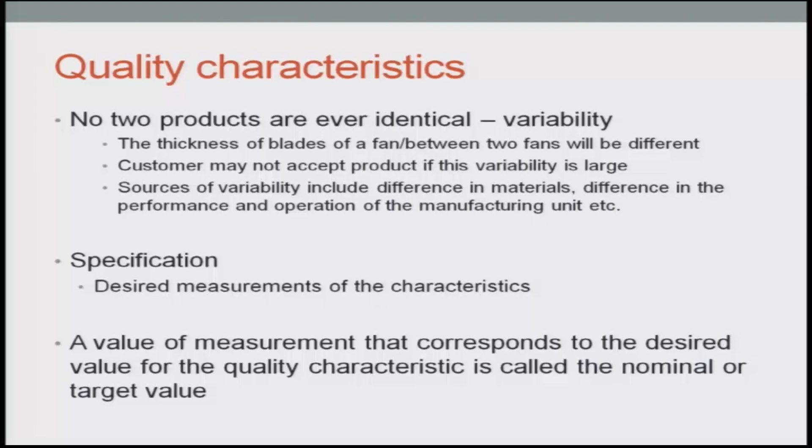So, this target value is basically the value which you want to achieve when you are trying to manufacture this product. Considering the example of the tie rod, the actual target value is 12.5 meters, or 12.5 feet, whatever it is.

The values which I am mentioning may not have any actual practical examples, but the values in the numeric sense would give you an idea of what the target values are, and the characteristics of the overall product would be to adhere to the numerical characteristics of shape, size, scale, color, whatever it is, based on which I am trying to utilize that product.

Or say for example, the quality of the cloth or the garment which I have purchased: if it is a woolen garment and the quality of the wool is very poor, obviously it means that with very few washes the level of quality or usage of the wool garment would decrease, which means the durability is very low, which means the variability would have a huge negative implication on the concept of quality for that product.

Now, we will be meeting for the first time a few characteristics in the quantitative sense, and you will see these characteristics appearing time and again when we discuss the quality control charts, the X bar charts, the P charts, the R charts, and so on. So, let us spend some time understanding this quantitative concept in a qualitative framework, such that when we actually do the problems, they would become much clearer to you.

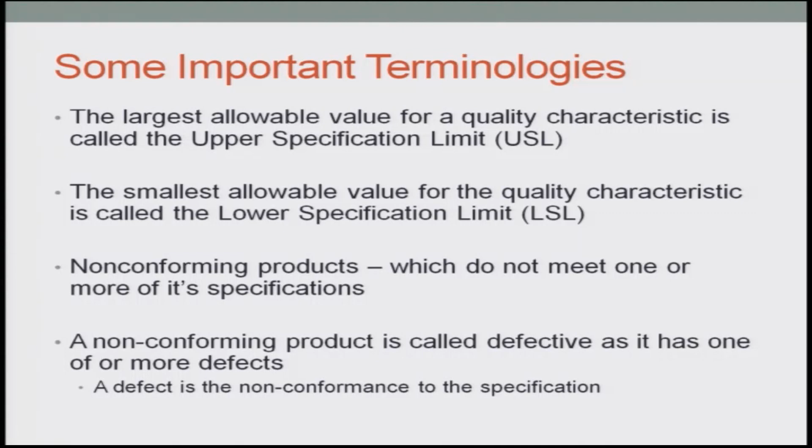It may be related to color, it may be related to length, it may be related to weight, it may be related to height, it may be related to texture, it may be related to, say for example, pH scale. Consider you are trying to manufacture a chemical, and consider it is a fertilizer, and you want the pH scale to be absolutely neutral.

In that case, if the characteristics of the fertilizer are not as per the pH scale, it is more acidic or alkaline, it would mean the actual characteristics would be non-conforming to what it has been designed for, and it would be called a defective product.

Or say for example, you have purchased a cloth to be used during the summers, and you thought that it should be able to give you comfort considering the very high humidity or high temperature, and the cloth is of terylene type or terrycot type. So, obviously, it would not be able to soak the sweat of your body, and it would not meet the actual quality characteristics for which you have purchased the product. So it would mean a defective product or non-conforming product.

Examples to continue this would be, consider the blade of the fan. Let the length and the thickness be two quantities which we are trying to measure. For the length, say for example, the target, which is the middle line, or considering this is a normal distribution, the mean, median, mode, whatever we say, is 30 centimeters. And if we consider the normal distribution to be true, which may not be true in many of the examples, we will try to utilize the normal distribution for our general studies.

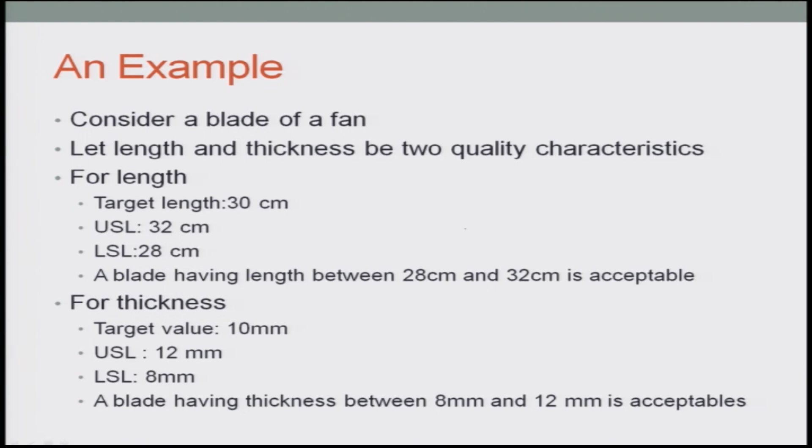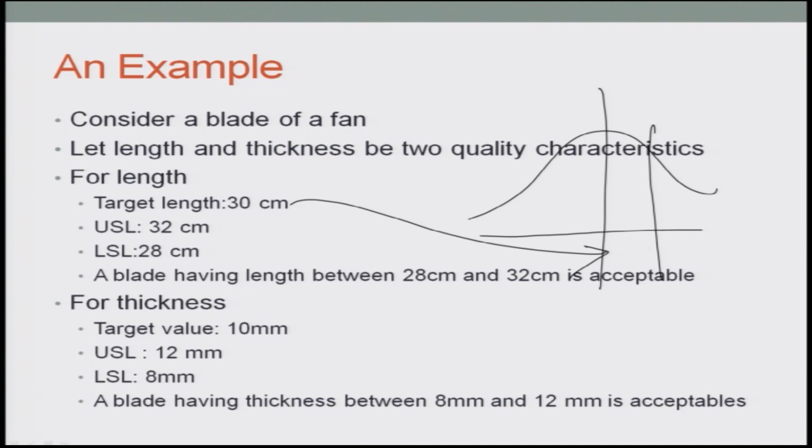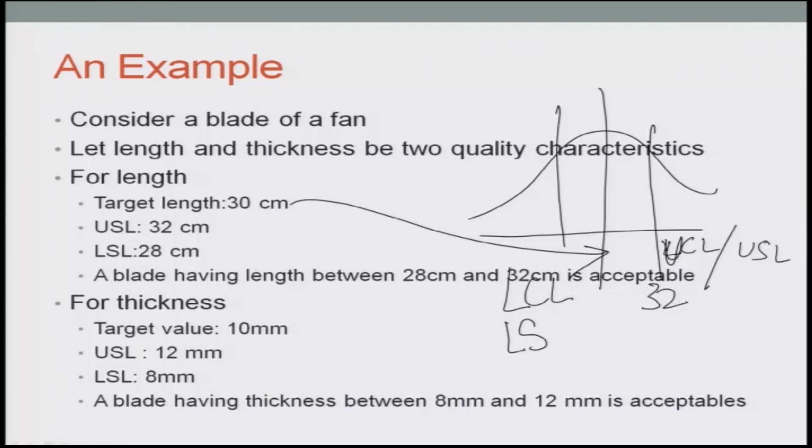So, this is the normal distribution, the mean value being 30, which we have measured, the UCL, sorry, UCL or USL being 32, and the lower control limit or lower specification limit being 28, which means the differences are 2 centimeters here, 2 centimeters here.

So these 2 centimeters which you are considering as the LSL and the USL need not be plus 2 or minus 2. It can be, say for example, plus 4 and minus 4, but the level of difference from the central value or the target value would depend on what you are considering as the variability or the actual dispersion of the distribution based on which you are measuring. I will come to that later on.

So, considering the example of a target value of 30, upper value 32, lower value 28, a blade having length between 28 centimeters and 32 centimeters is acceptable. Or consider the actual HP of a motor; it is rated, say for example, 200 HP, and if the motor is between a value of 190 and 210 HP, you will consider that motor as conforming to the actual quality characteristics.

Or say for example, you are making a special type of paint to be utilized in painting a room, and the grade of paint is, say for example, within plus and minus whatever level of measurement of paint you are utilizing. If it is conforming to that, you will utilize that paint in painting that room.

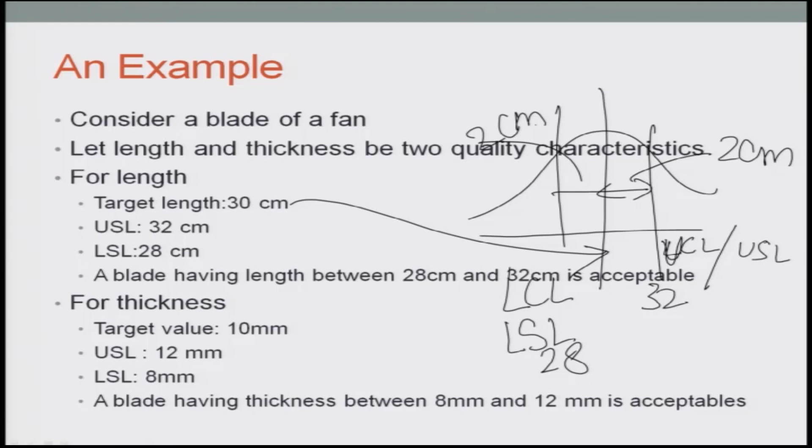So, this value of LSL, USL or the upper value and the lower value may change. Say for example, it may become 14 in the second example, and the lower value may become 6, which means 10 plus 4 is 14 and 10 minus 4 is 6. So, in that case they may conform to the characteristics depending on what you have preset as the values of the upper control limit and the lower control limit. That would depend on the level of quality which you want that product to conform to.

So, in that case all the products which are outside this range, to the right of 14 and to the left of 6, would obviously be considered as defective products and not conforming to the characteristics of quality which you have assigned yourself to measure.

Consider the examples further on. So, if you match with the length and the thickness, if a blade has length 32 centimeters and thickness 6 millimeters, then it is said to be non-conforming, defective and has one defect for the thickness. So, obviously, it meets the characteristics of the length, but there is a defect in the thickness. So, there is one level of defectiveness.

So, consider the second bullet point. Here if a blade has length 33 centimeters and thickness 9 millimeters, then it is said to be non-conforming or defective and has one defect, and the defect is with respect to the length. Because if you remember, the length target value was 30, plus value was 32, minus value was 28. So, this value 33 is above the upper control value, but this 9 millimeter was within the range. So, it meets the characteristics from the thickness point of view.

Considering the third bullet point, if a blade has length 34 centimeters and thickness 6 millimeters, obviously 34 means it is not conforming to the length, 6 means it is not conforming to the thickness. So, hence it is said that it is non-conforming or defective on account of both the defects, because it does not adhere to the properties of thickness and length based on the upper value and the lower value for this example.

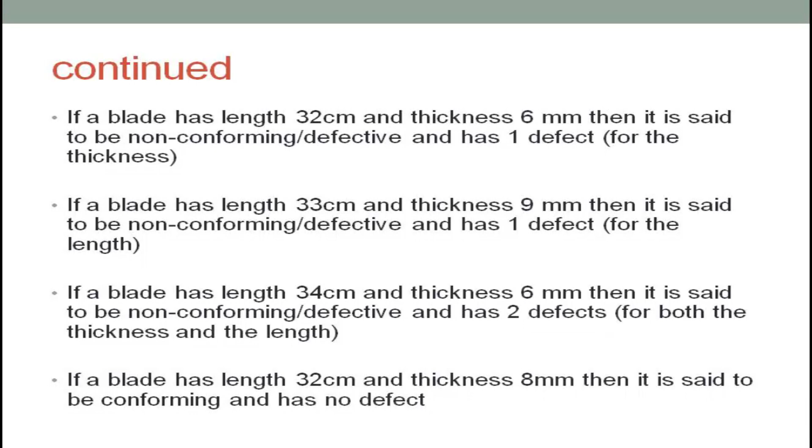Consider the last bullet point. If a blade has length 32 centimeters and thickness 8 millimeters, then it is said to be conforming on account of both length and thickness. Hence, it is not defective and it meets both the criteria, not to the same level, but the level word I am utilizing beforehand, and I will come to the overall concept of level of conformance later on as we do the problem. But in this example, the fourth bullet point means that it adheres to both length and thickness, hence it is not a defective product.

So, now with all the discussions about quality and what we mean by quality, the different dimensions of quality, the different types of characteristics of quality, how you measure quality, what you mention as the target value, the upper control value, lower control value, and what you say as defective items, we will go through the brief sequence of history of quality.

So, I would not be discussing much of quality from the historical perspective, but give you the main milestones at which quality has taken some jumps, such that we can really say that the concept of quality, the level of quality and the study of quality has really taken a front seat at those milestones, as quality has become more and more an integral part of our life as days have gone by.

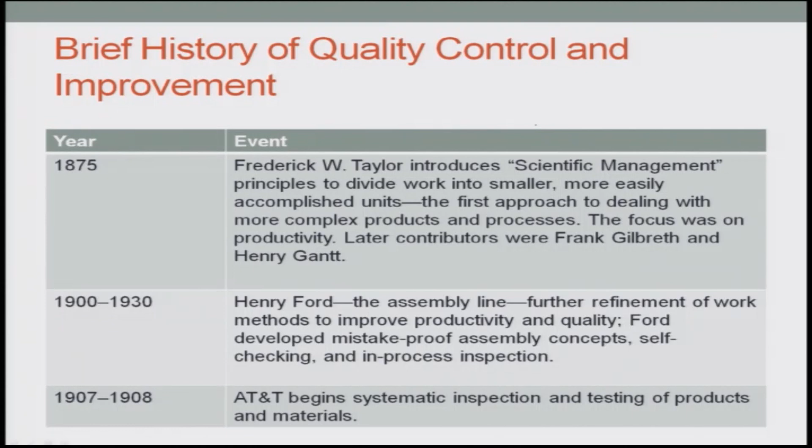In 1907 and 1908, AT&T began systematic inspection and testing of products and materials to find out whether they are conforming to quality or not. This I am giving as a sequence without going into the details of the discussion.

In 1908, Gosset, who used the pseudonym Student, proposed the introduction of the T distribution. The T distribution is one of the main distributions which comes out as an offshoot of the normal distribution, along with the F distribution and chi-square distribution. We will study the T distribution later on, the T tests and all these things. So, W. S. Gosset introduced the T distribution, resulting from his work on quality control at Guinness Brewery, the brewery which manufactures beer.

In 1915 to 1919, during World War I, the British government began a supplier certification program to adhere to the quality characteristics of the products being supplied to the armed forces and to industry in Great Britain. In the 1920s, AT&T Bell Laboratories formed a quality department emphasizing quality inspection, testing, product reliability and products conforming to the quality level.

Dudding at General Electric in England used statistical methods to control the quality of electric lamps and test whether they were adhering to the level of quality or satisfaction for which the products were being built. So, here the products were the electrical lamps.

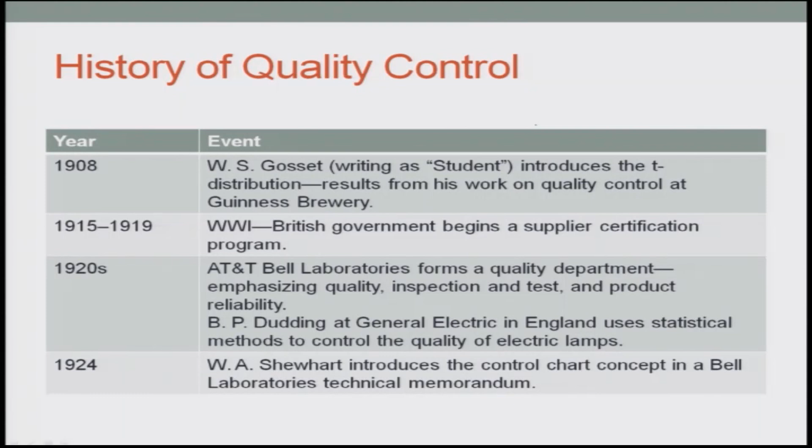In 1924, Shewhart introduced the concept of quality control charts at Bell Laboratories. Based on the work of the 1920s, where statistics were utilized to check how good or bad the electrical lamps being manufactured were, Shewhart came up with the quality control chart, so that the concept of statistics could be brought out in a very simple way to understand how the process was going on, whether the process was adhering to the quality characteristics, and if it was not, how things could be looked into in detail to understand where the problem was.

In 1928, acceptance sampling methodology was developed and was refined by Dodge and Romig at Bell Labs. If anyone is interested in understanding supply chain concepts and how sampling was done, Dodge and Romig came up with multi-stage concepts like two-stage sampling, such that you could get a better look at quality and monitor products undergoing quality inspection in a much better way. Based on the Dodge Romig plan, concepts of sequential sampling and sampling based on different sample size levels were developed later for those interested in statistics.

In 1931, Shewhart publishes the Economic Control of Quality of Manufactured Product, outlining statistical methods for use in production and control charts.

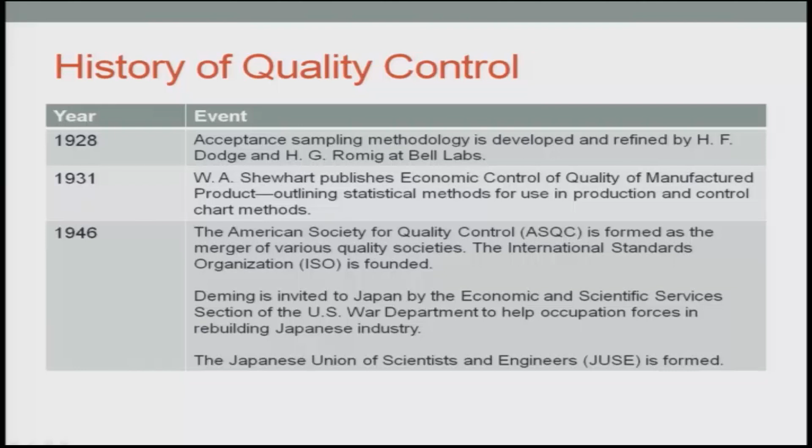The person sent from the US to build up Japanese industry saw the Japanese learn the tricks, and after 10 or 30 years, say in the 1970s, Japanese companies had captured the American market, both in cars and in electronics equipment. The same thing happened in the steel industry. There were obviously other reasons like cost, but the concept of quality was brought in by the Japanese in such a big way, by Toyota and Honda, that American cars were almost wiped out from the American market, and the Japanese slowly took control of the automobile sector in the USA.

In 1948, Taguchi began the study of the application of experimental design. We all know the Taguchi loss functions, which were utilized in such a way that one could understand the concept of design of experiments and how they could be used in the study of quality and process quality control charts.

In the 1950s, Deming begins education of Japanese industrial managers. Statistical quality control is brought into Japanese industry in a very big way and widely taught in Japan. Ishikawa introduces the cause and effect diagram. Based on Deming's teachings in Japanese industry and Ishikawa's diagram, these were utilized in a very big way to increase the productivity and quality of Japanese industries.

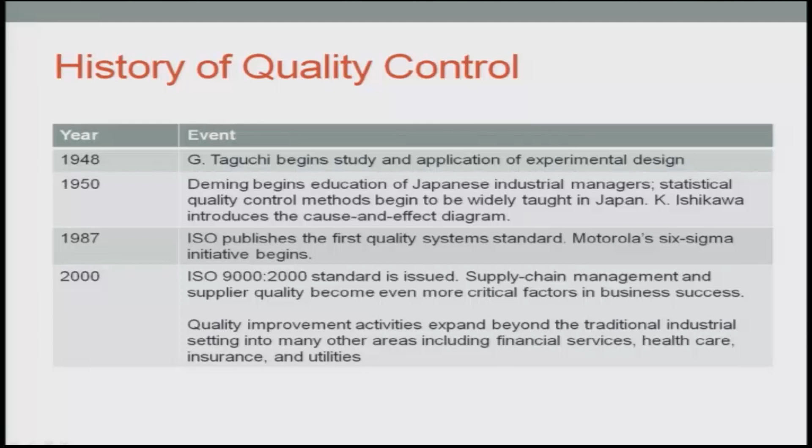In 2000, the ISO 9000:2000 standards were issued. Supply chain management and supplier quality became even more critical to business success, and quality improvement activities expanded beyond traditional industries into areas like financial services and health, including hospitals and doctors. It also came up in a big way in insurance and utilities as the services sector expanded, with industrial utilization of products and services taking a forefront in trying to deliver to customers.

With this I will end the third lecture and continue with the discussion of total quality concepts, and how what you are going to study makes sense in light of all three lectures we have studied, giving a qualitative feel of what is quality, what are the dimensions of quality, what are the metrics of quality, what do you mean by quality, what is robustness and so on, such that we can slowly utilize both qualitative and quantitative concepts to appreciate how quality can be brought into the picture both in production and service segments to improve and understand how things can be improved on all fronts. Thank you, and have a nice day.